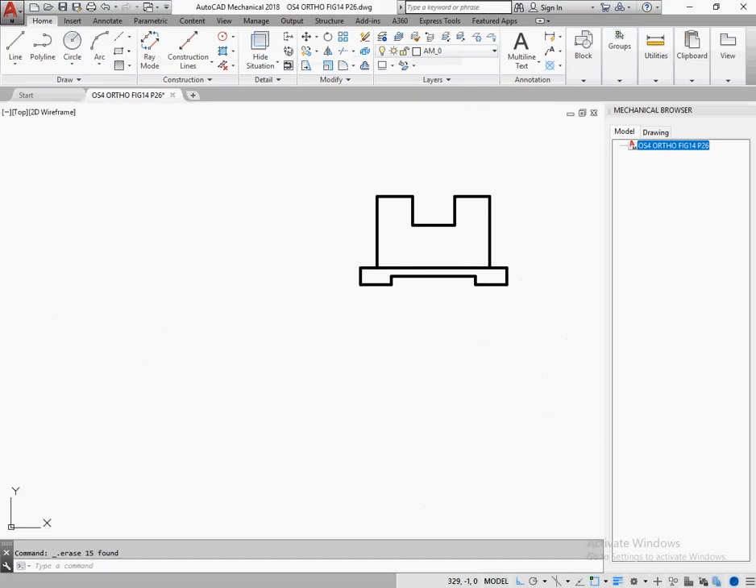So let's go back to our AutoCAD and draw construction lines to draw our base first. So this is our base. Let us start it somewhere, and as I told you, as we look here, we have 124. I need the middle, so it will be 124 by 2. It will be 62. So we have to go here and offset by 62.

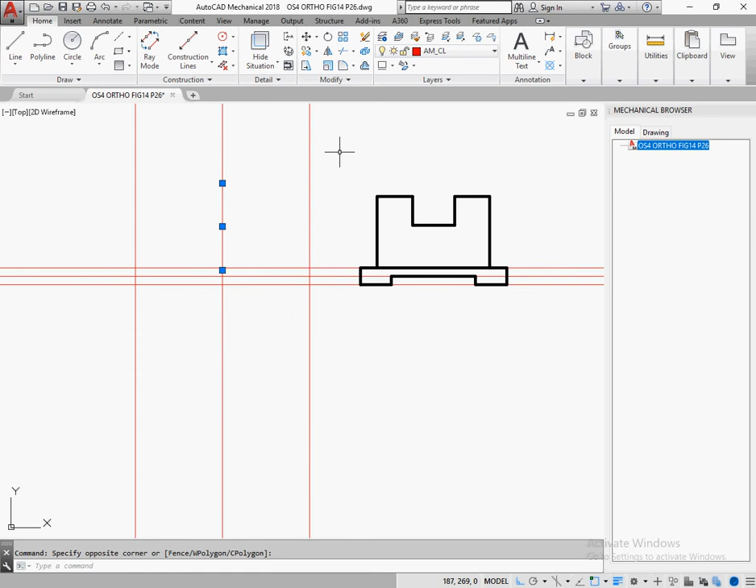62, enter. Now, in order to do this groove, it's 60, we have to go 30 to the right and 30 to the left. So I'll go back to my AutoCAD and click offset, give it 30, and go 30 to the right and 30 to the left.

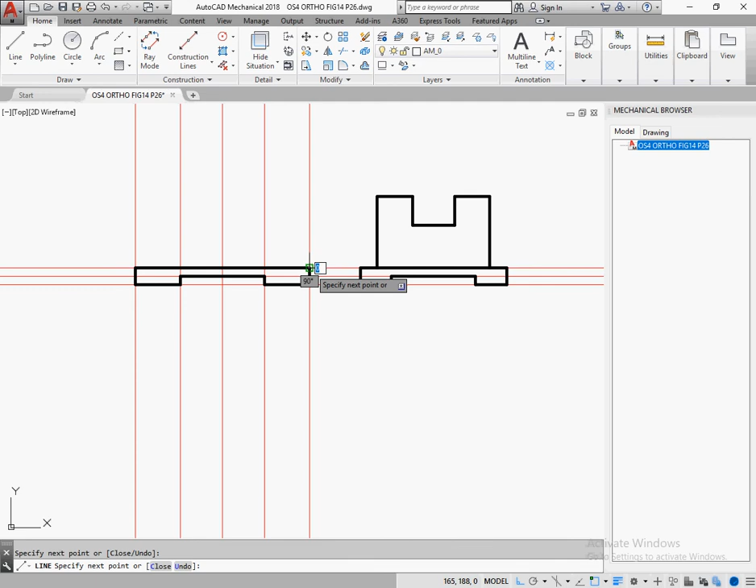My base is ready. I can draw my base now. Just sketch above the lines. And this is my base. Now let us draw our second part. Where is it? Here. So what do we have here?

We have 50, we are going here 20, and now inclined. The inclined line doesn't have a length. There's no angle and length of the inclined line, he just gave me that it's 40 down, and he gave me the beginning of my inclined line here. Between the beginnings of the inclined lines on both sides it will be 40, so from the middle to here it will be 20. So I have to take the 100 and take 20 from the middle.

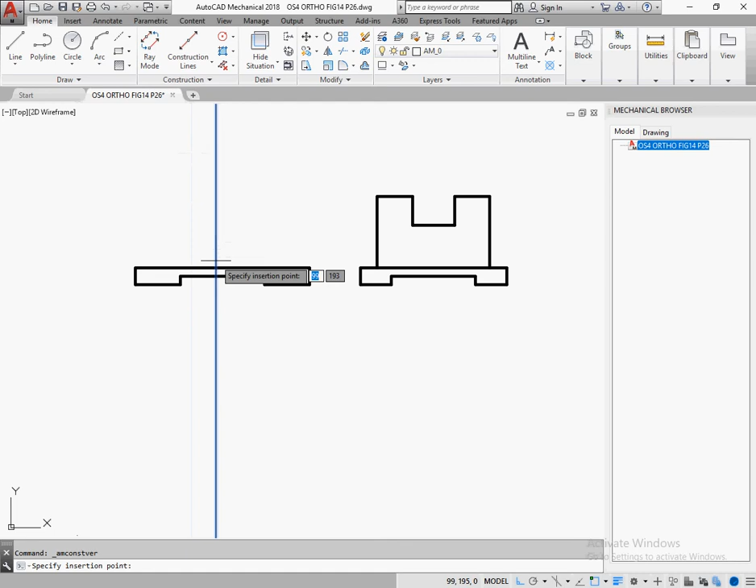Okay, let's go back here to our AutoCAD. This is my line, and I'll take offset first for 50, enter. This is my 100, and I'll offset 20 to the right, 20 to the left. Okay, let's go back to see what we have.

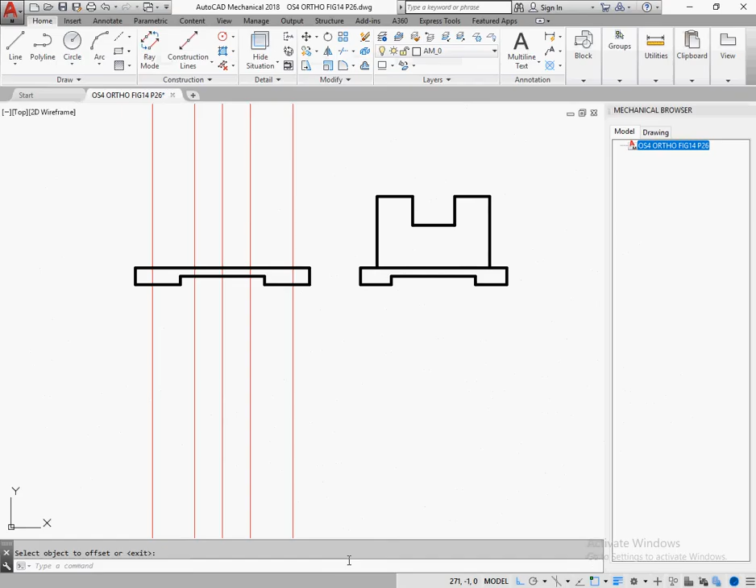My inclined line is up over the base by how much? By 10. So I'll take from here to here 40, or from here up 10, it will be the same, and the height will be the same 50 as in the side. So I'll take the 50 from the side and offset by 40, going down. Okay, let's do it.

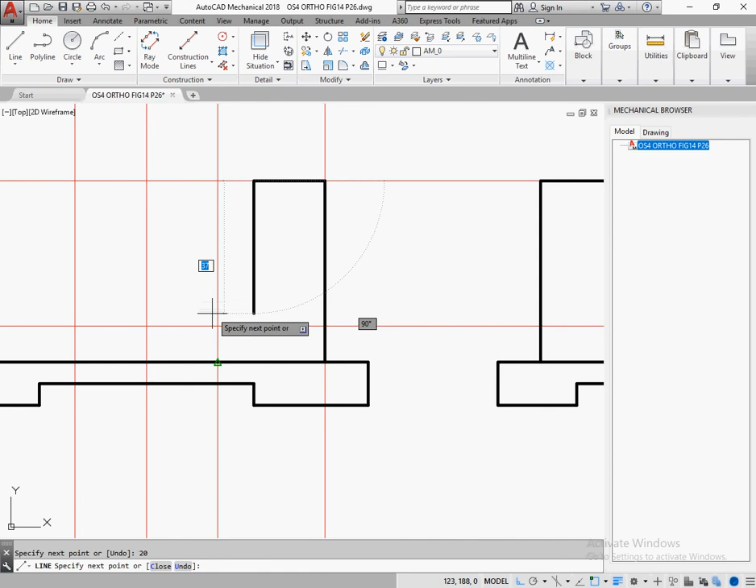Then we'll take a line from here to here. My part from the top is 20, and the inclined line will reach this intersection of my lines. It will go here. So from here 20, and from the middle to here 20. This is my inclined face. Can you see? 40, then 20 from here, and we have 20 from here, and this is my inclined face, at the height of 10, or going down 40.

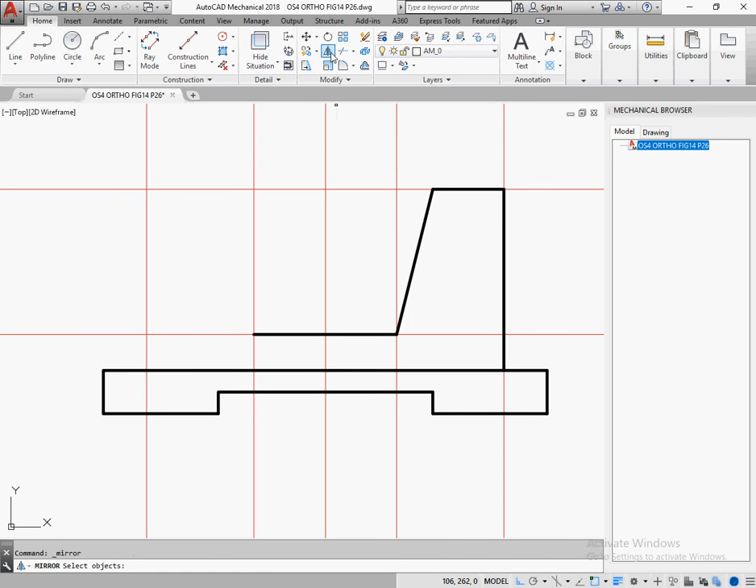So let's go back. Mirror, of course, this line with this line. Enter. My mirror plane will be here, enter, and I'll continue my front here. Easy, yeah? Finish. We have our inclined lines, and this is my shape. For the slot, we'll deal with it when we draw the top view.

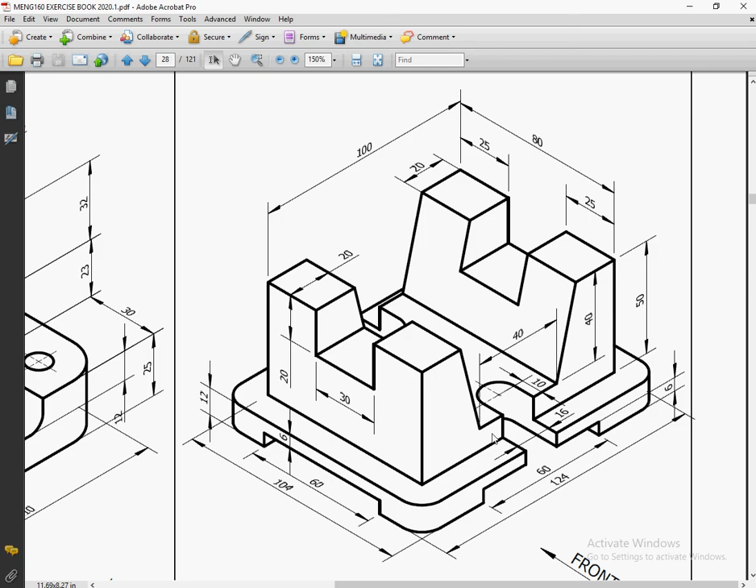Now we come to the end of our second part. So get rid of the construction lines, and save, don't forget to save. And this is my front and side view of the visible parts of my object.